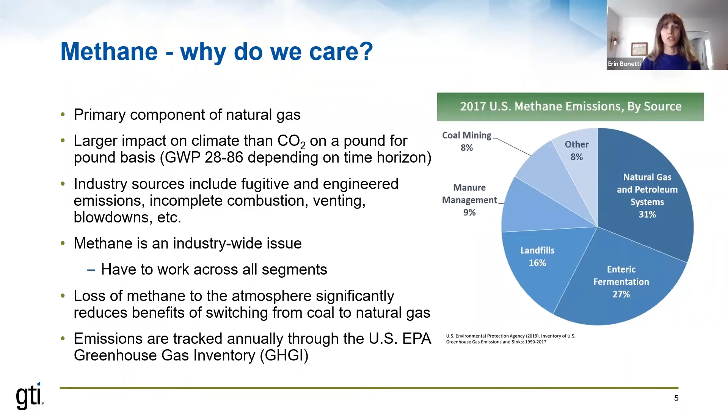For GTI itself, the methane emission work we're doing again covers the whole value chain for natural gas, and can roughly be binned into three categories: technology development—sensors, detectors, drones, characterization and development; second, data gathering, emissions characterization and analytics or models; and finally, mitigation solutions.

This lists a lot of the different funders and folks we're involved with in those areas. Two I want to highlight quickly are OTD, the Operations Technology Development. It's a collaboration, a not-for-profit corporation led by 26 natural gas utility members that serve about 50 million natural gas customers in the US and Canada altogether. They work together and fund a lot of research developing advanced technologies focused on the distribution system, so a lot of the work we do on methane characterization and mitigation in distribution is funded by OTD.

For downstream, we have done a lot of work with CEC, and I will go over one of those projects today, as well as CARB, and also UTD, the Utilization Technology Development. This is a not-for-profit collaboration partnership of 20 natural gas distribution companies, and they conduct near-term applied research in energy efficiency, environmentally friendly end-use technologies, and also funded the research I'll be talking about on tankless water heater emissions.

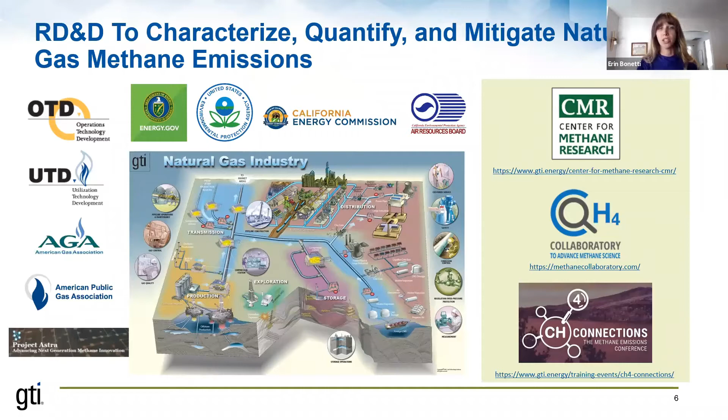I wanted to do a quick overview of Collaboratory to Advance Methane Science, which is an industry-led research collaborative that GTI is helping to oversee and guide. They have a number of projects on the upstream side, really helping to develop models and measurement techniques for methane emissions in oil and gas fields. So some really neat work here.

Definitely for any of these that I'm kind of just running through, if there is a lot of interest in hearing more details, feel free to reach out to me or reach out to Evan, and if it makes sense for someone to come and talk through it in more detail later, I'm sure that they would be happy to do that.

Another area in upstream mitigation is compressors, helping to redesign and develop new types of compressors and leak mitigation around pneumatic devices. For those familiar with the greenhouse gas inventory, this is a big source of methane emissions in the transmission and distribution sector, so a lot of work is going into designing this linear motor compressor technology that helps capture and recover natural gas leaked from compressors.

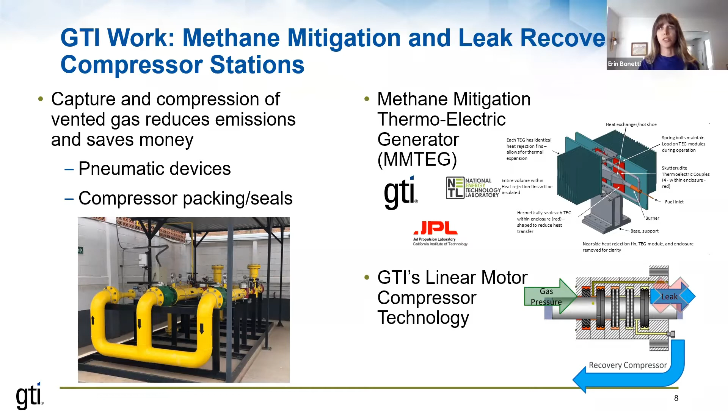We also do a lot of work in the development and evaluation of methane detection technologies. At our Des Plaines campus, we have a miniature pipe field where we can go out and do evaluations, looking at different point and shoot methane sensors, stationary continuous methane sensors or monitoring systems, and also different remote sensing or drone-based sensors.

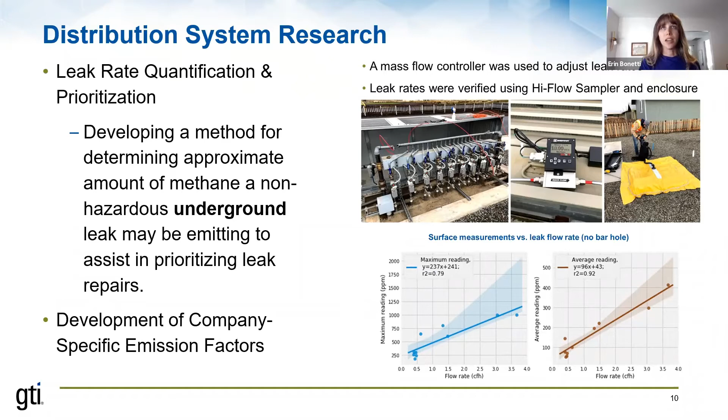On the distribution side, some neat work here directly with different LDCs, helping them both understand more about emissions from their distribution systems and methods for prioritizing leak repairs, in order to most effectively use their time and resources to mitigate emissions.

So that was all on the distribution and upstream side. I'm going to move now to end use methane emissions, and this kind of summarizes a number of the projects that are ongoing in different spaces.

We have research going on with EPRI measuring methane emissions from industrial facilities, with DOE measuring emissions from industrial customer meters, work in the commercial sector and the residential sector that I'll talk about in a little more detail, and then also residential customer meters.

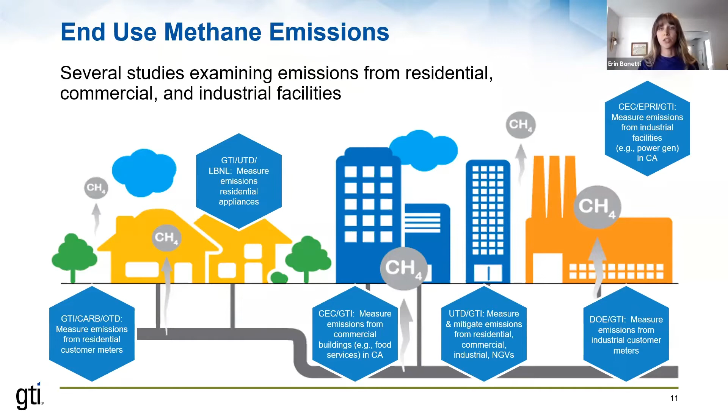This is kind of a plug for Chris Moore, one of my colleagues, who was going to come and talk a little bit more about the commercial industrial meter leaks that he led this project on, developing new emission factors for industrial meters.

Unfortunately, he wasn't able to make it today, but they did some really neat work that enabled them to develop regional emission factors more representative of the industrial meter sets present in different regions of the US. Results indicated emission factors that might be 6 to 8 times higher than what's in current inventories. But if folks are interested, I'm sure he would be happy to come another time.

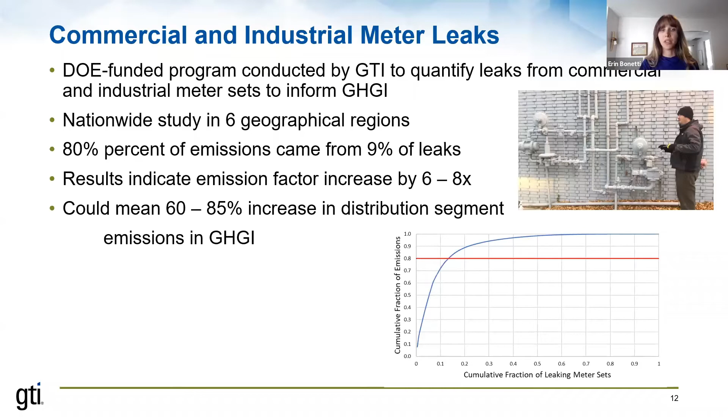As I transition into more details of end use projects, I wanted to put it into the big picture for GTI. Why is GTI interested in doing methane emission research in the residential and commercial sectors? It really comes down to our goal of helping to reduce greenhouse gas emissions from the built environment, and the role that natural gas and renewable natural gas can play in that.

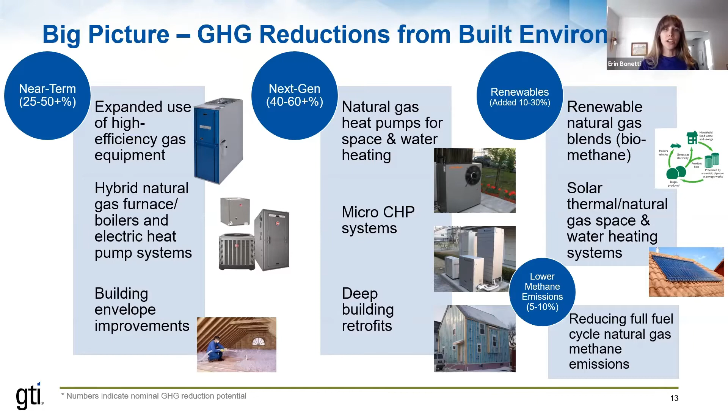Within our spectrum of research, a lot of it is focusing on energy efficiency for near-term reductions, next generation equipment with COPs of over 1 for continued efficiencies, alternative low carbon fuels, and also lower methane emissions. So methane emission quantification and reduction fits into this broader goal that we're working on.

Hopefully that wasn't too fast, but we'll go now into a deep dive into 2 of the projects that I was particularly involved in. I'm happy to talk about these 2 particular end use projects.

One was measuring in the field commercial food service methane emissions in California restaurants, and the second was lab measurements of methane emissions from tankless water heaters. I think talking about both of these helps emphasize the importance of both field measurements and lab measurements in understanding different factors that contribute to methane emissions.

As I go through it, you'll see some of the really high emitters we observed in the field had a lot more to do with maintenance issues and those sorts of factors. Whereas in the lab, we could focus a little more on the actual design of the equipment, and with a properly operating piece of equipment, ask where the emissions are generated in that event.

Also, please feel free to jump in with questions as I'm going through these. I hope it can be more of a discussion instead of me just talking at all of you. So before I jump into this, I'll pause and see if anyone wants to jump in with anything right now.

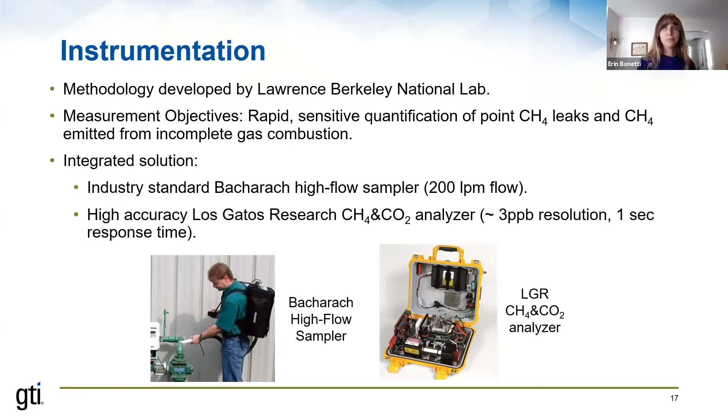For point leaks, for some of you this is a fairly standard way of measuring point leaks in industry. You gather them into the much larger flow of diluting air from the high flow sampler, and then compute the leak rate by mass balance, comparing the ambient concentrations of methane and the concentration of methane in that collected stream with a known flow rate.

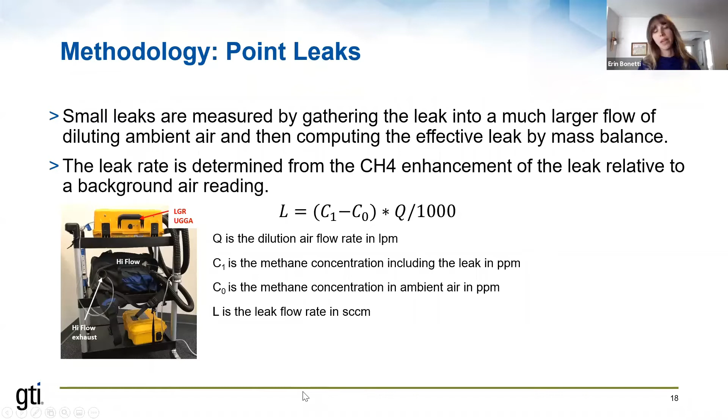For our specific effort, we ended up pairing the high flow sampler, which is really more for larger natural gas facilities and larger leak rates, with the UGGA that could measure these really tiny fugitive methane emissions and leaks that we were finding in the piping inside of buildings.

For the exhaust, we're just using the ultra portable greenhouse gas analyzer and looking at the relative enhancement of methane and CO2 that we measured in the exhaust. We take an ambient measurement and then probe the exhaust, and that relative enhancement of methane and CO2 enabled us to get a ratio that could be used to calculate the fractional methane emissions from combustion.

That was based off the fact that if you have a mole of methane coming in and it combusts 100%, you'd have the same number of moles of CO2 coming out. By looking at how much methane we actually saw in that exhaust stream, corrected for ambient concentrations, we got a pretty good sense of what the fractional combustion efficiency was.

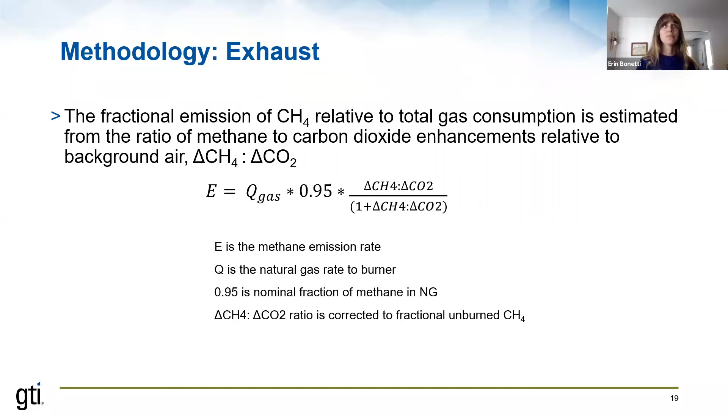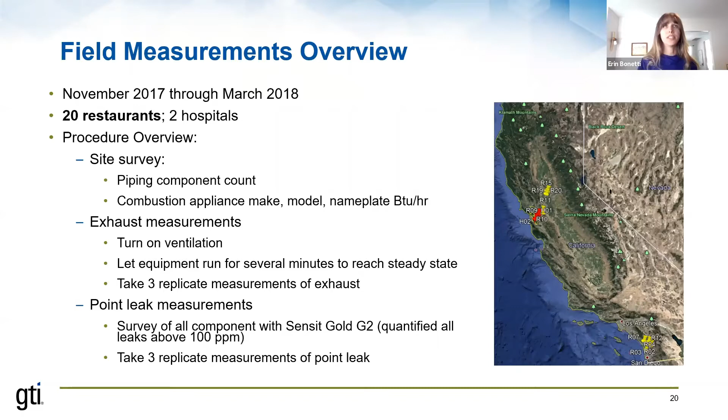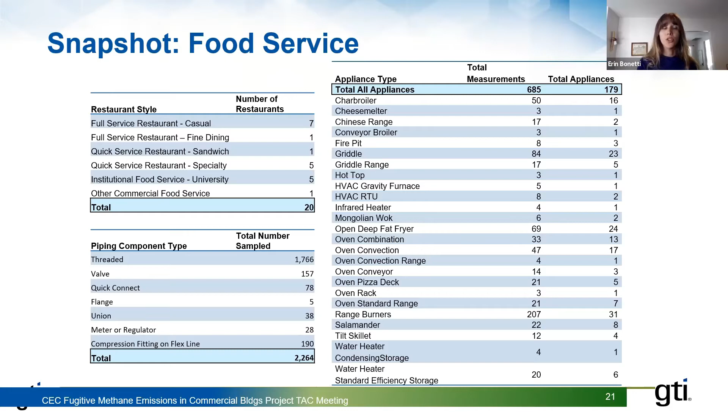As I mentioned, we went to about 20 restaurants - I'll skip through this for the sake of time. We ended up sampling over 2,000 different piping components, using a Sensit to look for leaks at each of the components. We also ended up taking measurements of about 180 appliances.

This is just showing the methodology: sampling each of the joints with the Sensit, and when we got a hit, actually measuring it with the high flow. For the equipment exhaust, probing the exhaust and measuring those methane and CO2 enhancements.

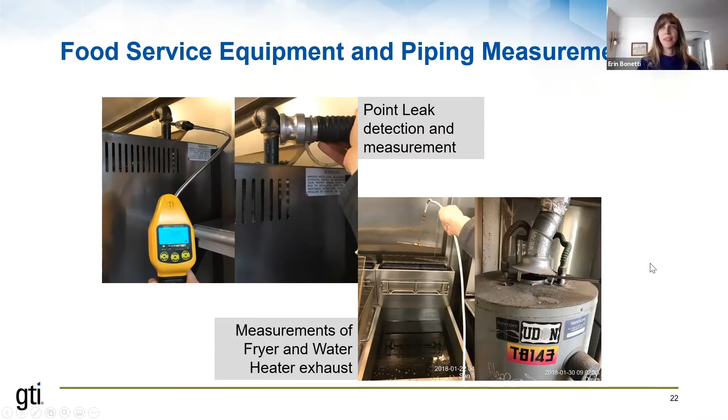So this is what raw data would look like for a leak measurement. You have the ambient, you start collecting the leak, measuring the methane enhancement there, and that difference multiplied by the flow rate is going to get you your leak rate.

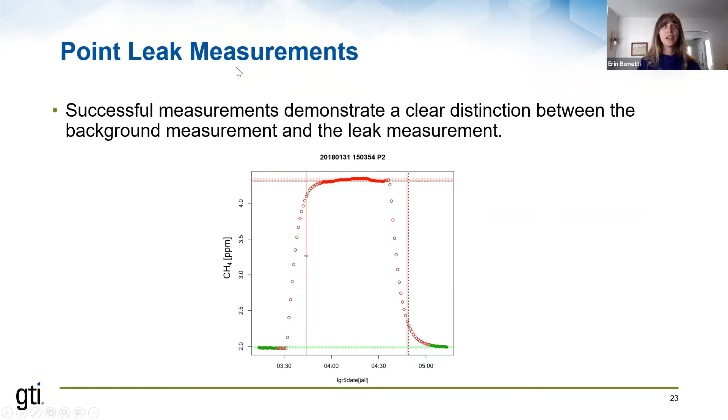For exhaust measurements, what we're looking for is a correlation between the CO2 increase when you stick your probe into the exhaust and the methane increase. When you have incomplete combustion, you're going to end up with a positive linear relationship between the methane and the CO2. When you have complete combustion, or possibly even some methane scavenging, then you're going to see the opposite.

And the ease of this methodology was great for getting in and out of restaurants. I'm not sure if any of you have worked in food service in former lives, but it's really busy. You'd have to get in there, in the hour before they started prepping, do everything we could, and then get out.

So one of the downsides, though, is this whole study was all based off of steady state measurements. As you'll see in the next talk, or many of you who do, say, residential equipment methane emissions, a lot of the emissions are coming from that cycling behavior and from the ignition and extinction. So that's definitely a gap in the study that we'd love to get back out there and do some of the transient emissions. But just for your context, as you're looking at results, this was all steady state.

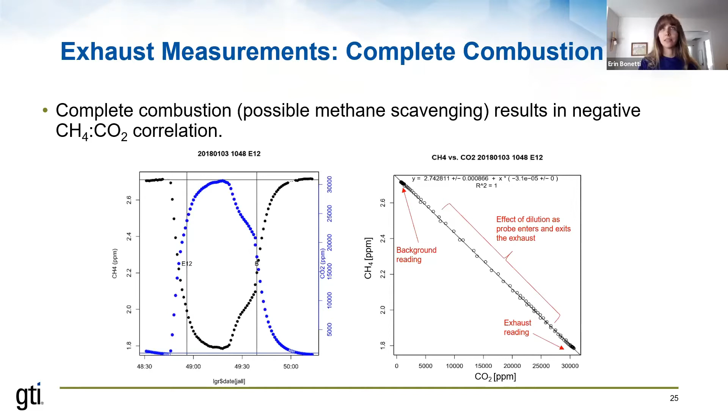So we looked at the fraction of unburned methane as the fundamental metric because it's easier to apply as we try to expand it over populations and different types of equipment, and it just gives a lot more flexibility as we did some of the statistics at the end.

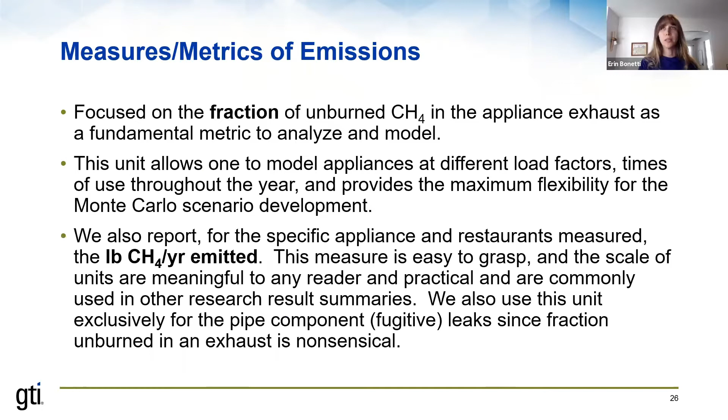This is a histogram of the exhaust emission measurements and fraction of unburned methane from the appliances. So you see we've got a majority that are operating well, zero emissions, and then you have this really long tail distribution. I gave two examples because you look at these fractions and think, how can it be 0.3 for methane? That seems so high. But when you looked at some of the equipment out there and the disrepair it was in, there's methane coming from all these ports not being combusted because something is blocking the ignition from going all the way around the burner. So as you get into some of these places where maybe maintenance hasn't been kept up, you are going to see really, really high emissions.

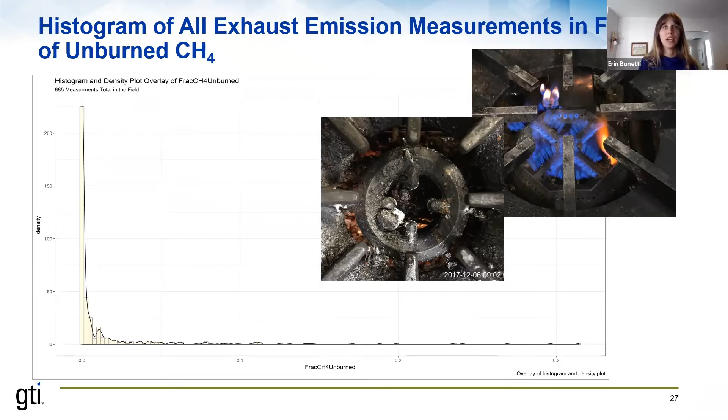Again, this just kind of shows the range of equipment that we measured and the variation in emissions that we saw. The fraction unburned is on the x-axis.

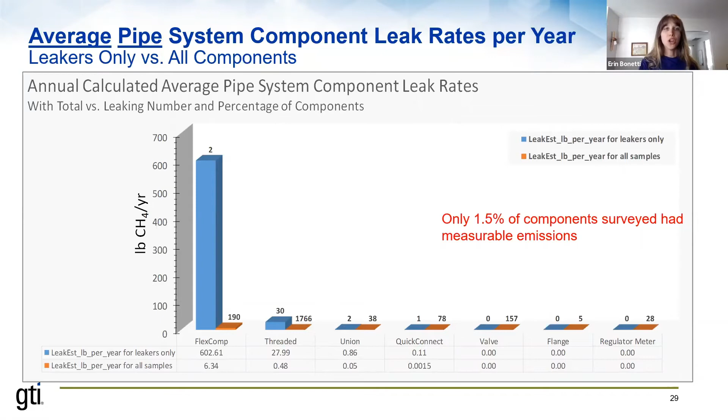For pipe leaks, really what I want to focus on here is that the majority of what we measured was not leaking. Only about 1.5% of the components that we surveyed had measurable emissions. And of those that had measurable emissions, the top 3% or so were causing over 50% of the total emissions that we measured.

Just to keep time down, this is showing all the different restaurants that we visited. Front is pipe leaks, middle is the emissions from exhaust, and then total in the back. So it kind of shows the range of what we're seeing. Generally when we're seeing these really, really high emissions, that might just be from one or two pieces of equipment that had maintenance issues, or a quick connect or some other piping component that really needed to be replaced.

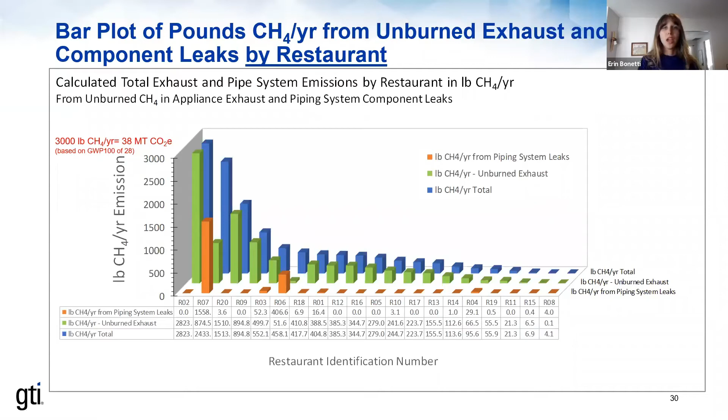So this is more to give a sense of, okay, well, we did all these field measurements. What really was the goal of this project, though, was to see how it could be applied to larger estimates of larger populations of restaurants.

So the data from the field data collection and the statistical analysis was used to create different probability distributions of the fraction of unburnt methane for appliance types, or probability distributions of the mass emission rates from the pipe components. And then from these distributions, a large theoretical population of appliances and piping components was created. That statistically generated population was the sampling pool that we then used for the different scenario analysis.

So for each scenario, we had to basically create an inventory of appliances and piping components. And so a pretty good knowledge of the population that you're looking at is needed to use the data.

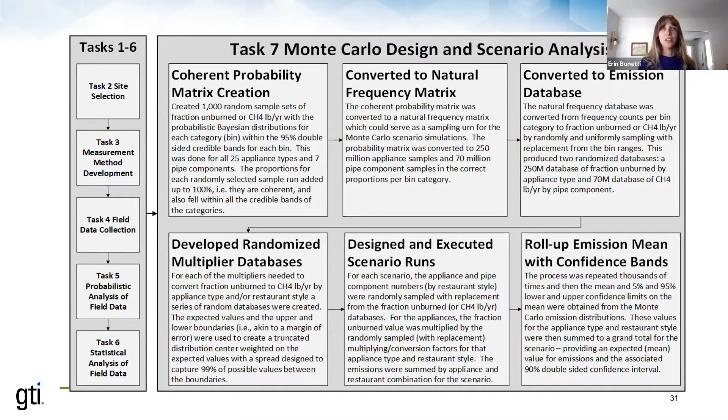This is just an example of the output.

So understanding, okay, what are the different types of restaurants? What is the population of appliances? Because each appliance has a different emission profile for each of those restaurants, and then doing the Monte Carlo simulation to get the output and total emissions.

I just want to point out, because we'll care about this number later, this was a scenario that we ran for kind of a fake large region that had about 24,000 restaurants. You could think of it as probably about the size of the LA plus San Diego area, pretty big region.

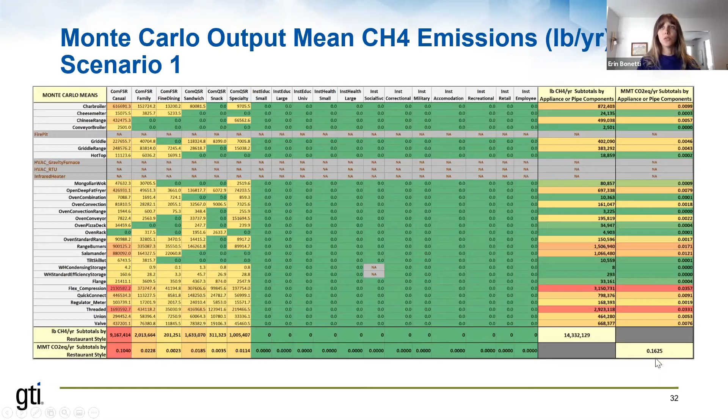And so from our measurements, we were getting about 0.16 million tons of CO2 equivalents per year. So we'll just focus on, this was the different 7 scenarios we ran, but again, we'll just focus on that first one. So what are the main findings?

First, this was a very small scale field measurement, so really a bigger sample size would be ideal if you're going to be using this methodology to extrapolate to, say, the state or larger regions. But from the small scale field measurements, the results did indicate that the fugitive emissions from commercial buildings might be higher than characterized in the current inventories.

This is the California Air Resources Board methane inventory. For the whole commercial sector, the methane emissions were estimated at 0.02 million tons of CO2 equivalent. And then from that scenario we did, which might just be representative of a portion of California, we were seeing more like about 2 orders of magnitude, or an order of magnitude larger than that. So that was the first finding.

And then next, for both the pipe leaks and also the appliances, the top 3% of the leakers accounted for over 50% of the total fugitive emissions. So there's a lot of potential here for identifying and mitigating those small portions for a really big impact on reducing emissions.

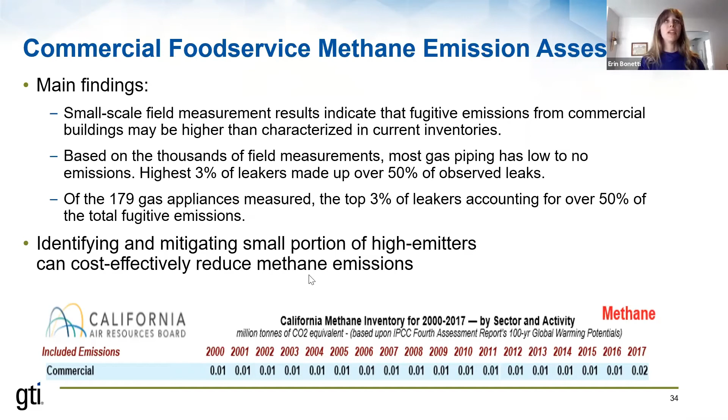Cool. All right, if there's nothing else right now, I'll go on to the next topic. I think at least a few of you on the line have heard some version of this talk before, but hopefully not too many of you. So I'm going to jump into this.

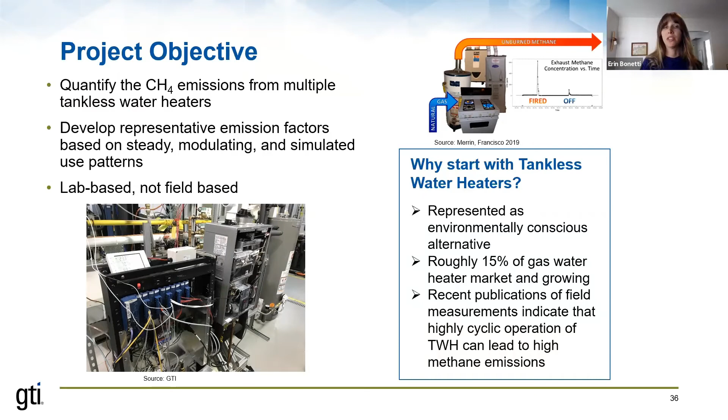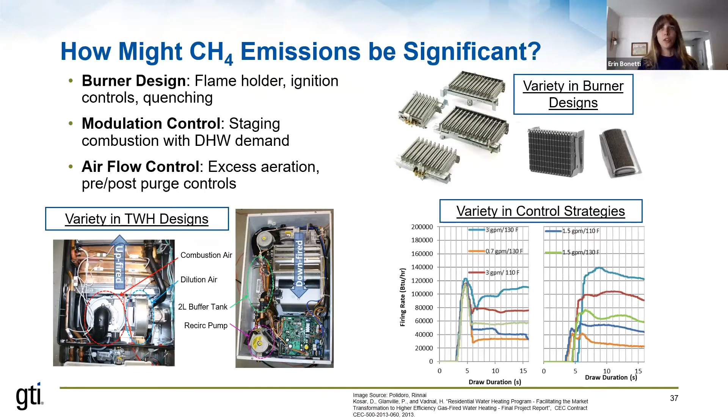In our selection of water heaters, this was a pretty small project - we only looked at 3 water heaters in the lab, but we tried to get ones with some of those differences. The first was a non-condensing up-fired unit with a constant speed combustion air blower, so we were seeing really high excess air at low firing rates. It was a cartridge style with 3 regions of the burner that would turn on and off to meet demand.

The next 2 were both condensing down-fired units, with really tight control of excess air via their blower, and mesh style burners. The big difference was that water heater number 2 had a fully modulating valve - the whole burner would just modulate up and down. Unit number 3 had 2 stages of the burner that would ignite, each could also modulate, but they would ignite or extinguish depending on the level of demand.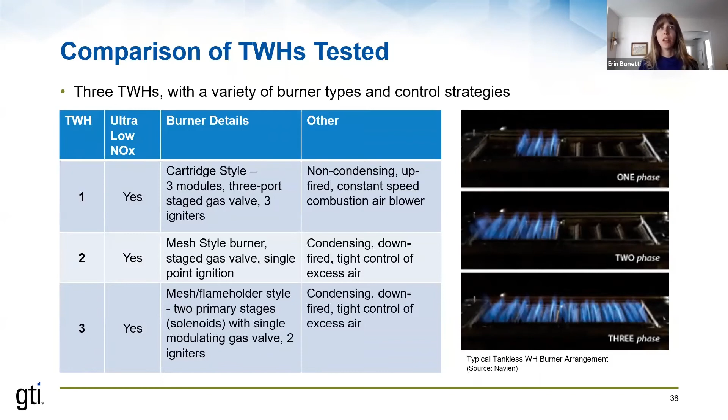This isn't going to be news for any of you who have done this sort of equipment measurement before, but I wanted to talk a little about the data collection and analysis methods we used, and mainly the challenges we faced.

We were doing direct exhaust sampling, and with that you run into methane sampling challenges because of the large range in methane concentrations in the exhaust. You might see pre-ignition or extinction puffs greater than 8,000 ppm of methane, down to a steady state emission less than 1 ppm, so below ambient. They're also highly transient - those peak emissions at ignition are only at the peak for maybe a second or two, then settle out within 30 seconds.

Our approach for handling that was using a dual analyzer system. We had a rack-mounted flame ionization analyzer with the range we needed and a really short response time, to capture the shape of the peak. We also used the UGGA from the last study I talked about, which gave us the ppb resolution we wanted to understand the steady state emissions when they got really low.

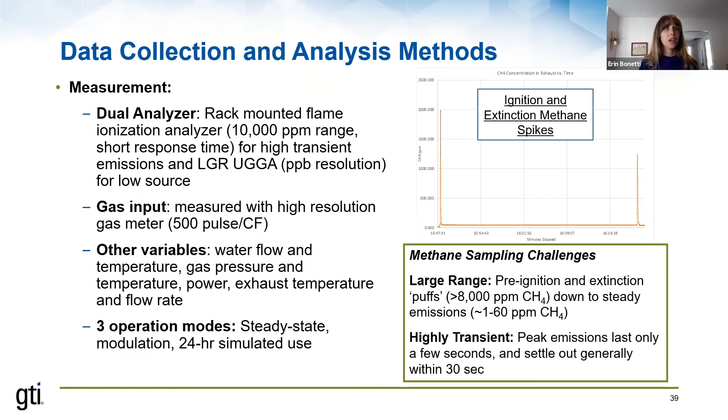Some other things we measured: a high resolution gas meter, controlling outlet temperatures, water flows, power to the unit, exhaust temperatures, and we looked at 3 different operating modes that I'll talk about in more detail later.

For calculating emissions, we used a mass balance approach looking at the exhaust gas mass flow rate calculated from the gas input we were measuring, and also the exhaust composition directly measured - CO2, methane, and the other ones listed. That mass balance method works really well for combustion periods when the burner is on and operating steadily, but not so great for transient periods when the burner is first igniting or right after it extinguishes.

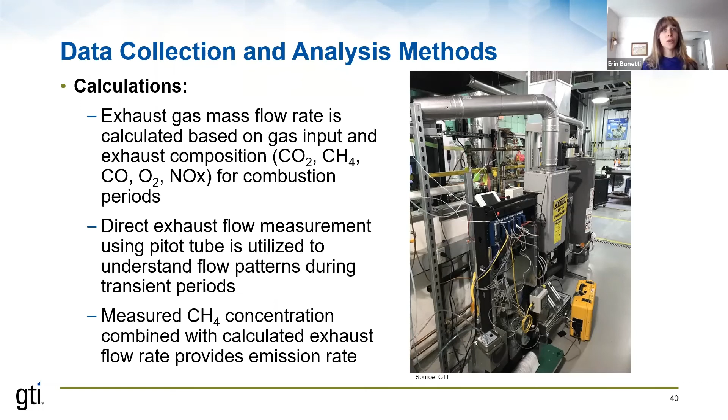So we supplemented that with direct exhaust flow measurement using a pitot tube in the exhaust, to understand what those flow patterns looked like during the transient periods. The combination of the mass flow rate of the exhaust with the actual measured methane concentration gave us our emission rate.

The 3 different tests that we ran: we did a baseline test, a modulation test, and then a 24-hour simulated use test. For the baseline test, this is just the max hot water draw that's going to meet our outlet temperature. It gave that steady state emission at a firing rate close to the design firing rate of the burner, and we also got the ignition and extinction emissions from that.

For ignition and extinction, we're looking at about 75 to 125 or so milligrams of methane for each ignition and extinction event. For the steady state, this is in grams per minute.

Tankless water heater 2 and 3, we basically were measuring nothing or very, very low methane in the exhaust. And when you actually look at the amount of methane that's being consumed from the combustion air going into the water heater as well, these actually would be net negative emissions at that point.

The difference is in tankless water heater number 1, where we're actually seeing a higher level of emissions during steady state operation. That ends up being about 0.07 when you're looking at mass of methane relative to the mass of natural gas introduced to the water heater.

I thought it's useful sometimes to also think about how big these ignition and extinction emissions are compared to steady state emissions, on an equivalent basis of how many minutes of steady state operation it would take to equal those ignition and extinction emissions. For tankless water heater number 1, it was about 3 minutes or so. For the next 2, their emissions are so low it starts getting kind of nonsensical — pretty much everything's coming from ignition and extinction.

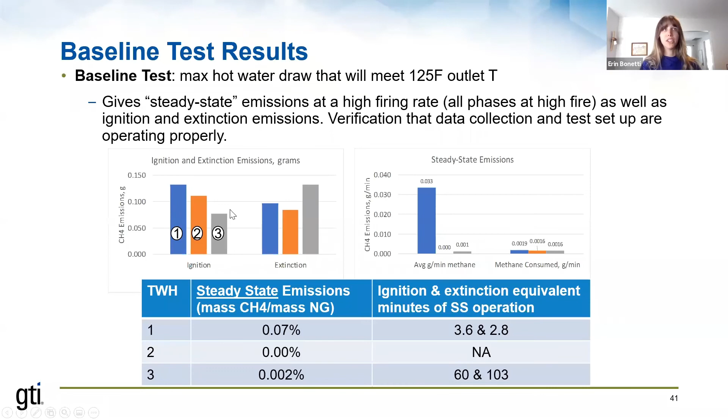And again, emphasizing that was for operating close to the design rate of the burner. So the next test we did was a modulation test, and with this we wanted to understand, if we already have an ongoing draw at the water heater, what happens if we change that draw — either cutting it or increasing it instantaneously — how does that affect things?

That gave us both the emissions at that actual modulation point, and also helped us understand, as we stepped through these different draw rates, what the steady state emissions are at different firing rates of the water heater.

The first plot I want to focus on is looking at any peaks of emissions that occurred at the point the draw changed. The big takeaway is: if there isn't a burner or a portion of the burner turning on and off, you're not going to see emissions. If there is, you are going to see emissions.

Pretty much everywhere for tankless water heaters 1 and 3 — the blue and gray bars — they had portions of the burner turning on and off, and you see emissions similar to the ignition and extinction emissions. For tankless water heater number 2, which had the fully modulating burner, the only time we saw emissions during those modulations was when we suddenly cut the flow rate down to 1 GPM from its highest water draw rate, and the burner briefly turned off.

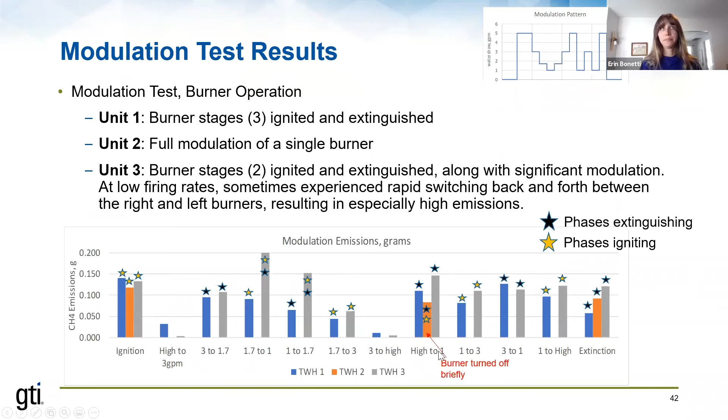Some other interesting things occurred during the modulation testing. For tankless water heater number 3 — sorry, this is a kind of messy graph — it's showing the gas input in blue and CO2 in orange. During these periods, when we had either a 1.7 or 1 GPM draw, there was cycling back and forth of the CO2 concentrations in the exhaust. What was happening was the two sides of the burner were rapidly igniting, turning off and igniting, switching which side was operating.

So when we start looking at these steady state emissions, that's where you get these outliers, with that burner behavior of cycling on and off as the outlet temperature is pretty much met and it's trying to decide whether or not to turn on the burner. But I want to zoom in and, putting aside that operational issue for now, just look at the periods where the burner was operating steadily.

For tankless water heater number 2, across the full range of rates we looked at, we were seeing no emissions. For the other 2, there tended to be a pattern when looking at grams of methane per kilogram of natural gas supplied to the burner — as it gets closer to its design rate, that ratio starts to go down.

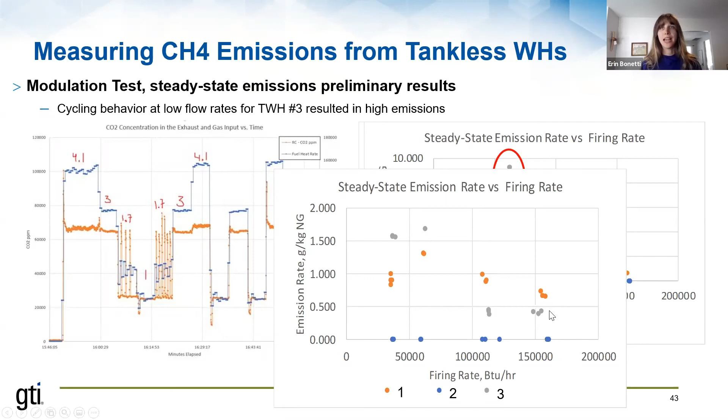The next test we did was the 24-hour simulated use test, basically running the DOE UEF testing for the high usage case. That's 14 draws over 24 hours for a total of 84 gallons a day. That was to give us a sense of how much methane emissions we're looking at for a tankless water heater each day. We ended up with about 2 to 3 grams per day of emissions for all the water heaters, which when looking at that as a volume of methane per volume of natural gas is about 0.27 to 0.36%.

The majority of this is coming from the ignition and extinction. In the case of tankless water heater 2, it's coming only from the ignition and extinction events. Because the majority of it is coming from those ignition and extinction events, the grams per day or percent emissions is really specific to the firing pattern assumed for the test. I have a slide later that's borrowing some information from Eric's report, but in his field testing he was seeing users with maybe 30 plus draws per day, so you're going to see a much higher percent emission rate for that situation than this more controlled simulated use case.

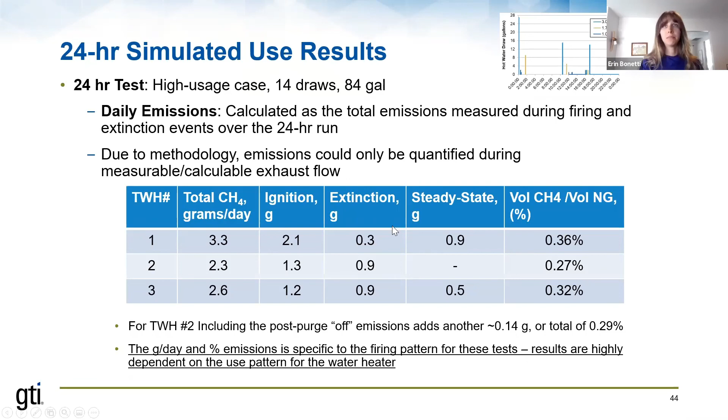So, summary: ignition and extinction is where really the emissions are happening for every water heater that we looked at. During modulation, again, it's only if there's ignition and extinction at the burner, and then for steady state operation, it depends on the burner design and also the firing rate affects those.

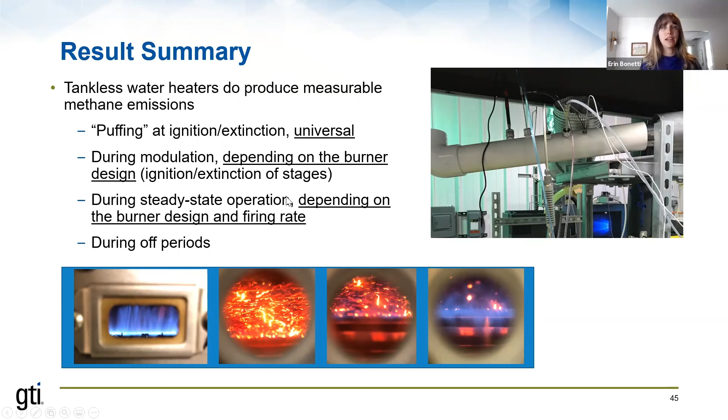Just to put it in context, this is using a 0.35% emission rate. I wanted to put it in context of what about the overall emissions from the water heater, what about overall emissions from a home. So here on the left, this orange bar is the methane emissions at the water heater that we measured. It ends up being about 2.6% of the total CO2 equivalent emissions from the water heater, the majority coming from combustion CO2, and then a portion - this is for a full fuel cycle emissions, so also including the upstream emissions from electricity and natural gas use - a portion from that as well, so about 2.6%.

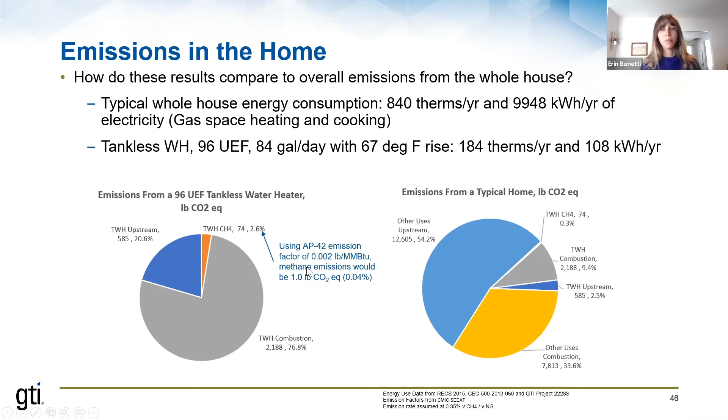And when you put it in the context of an entire home, it ends up being about 0.3% of the whole home's overall full fuel cycle CO2 equivalent emissions. To put this in context though, it doesn't seem too big, but compared to the current emission factors being used - say using the AP42 emission factor for enclosed combustion - then this would be 0.04% instead of the 2.6%. So a significant jump up from what might typically be used right now.

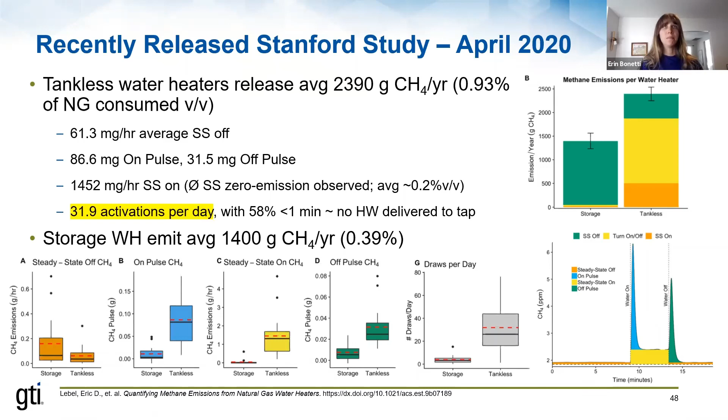This again highlights what I mentioned before, this is all from Eric, but that emphasis on the number of activations per day for the tankless water heaters is really significant and is going to be the driver of the emission rate that's assumed. For really any inclusion of not just tankless water heaters but other appliances as well, I think we're going to be seeing a similar pattern. So inclusion of those into inventories, getting a really good understanding of what a typical draw profile looks like, what a typical use case looks like, is really important for being more accurate in these emission rates.

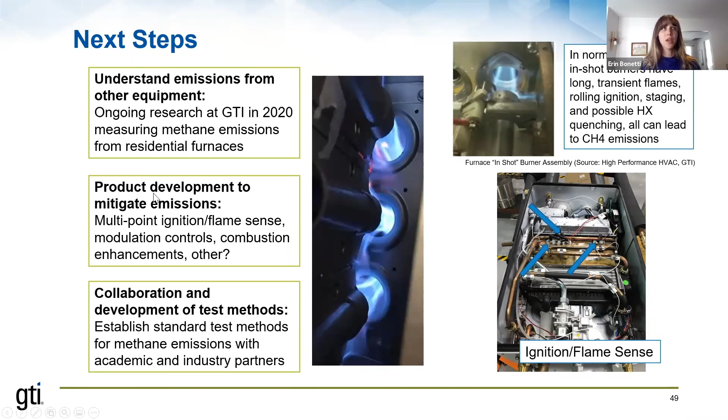So what are we hoping to do next? One, understanding emissions from other types of residential equipment - we're going to be getting some furnaces in the lab soon to do similar testing on those. And then along with that, I think really important is collaboration, both between research organizations like ours, academia, and also manufacturers, to work on development of standardized test methods as this starts getting more attention. And then ultimately, as we start getting more pieces of equipment and measuring them, we're hoping to work with manufacturers on mitigation efforts.